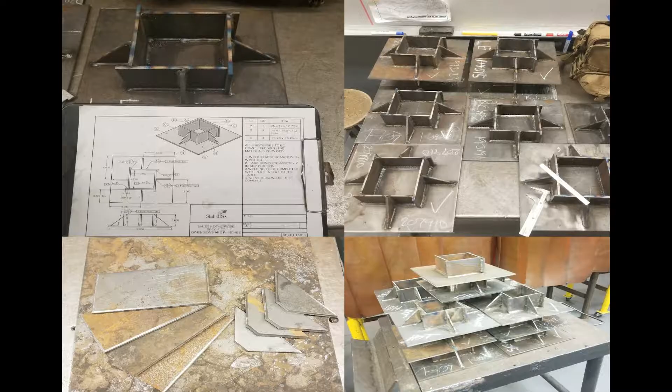And that brings me to my fabrication class. I teach students how to read and interpret blueprints and the many welding symbols they may encounter, and I have several projects that put the information to use. I also teach students how to use various machines that aid in fabrication and are not covered in conventional welding courses. The picture you see here is one of my many projects that I give students.

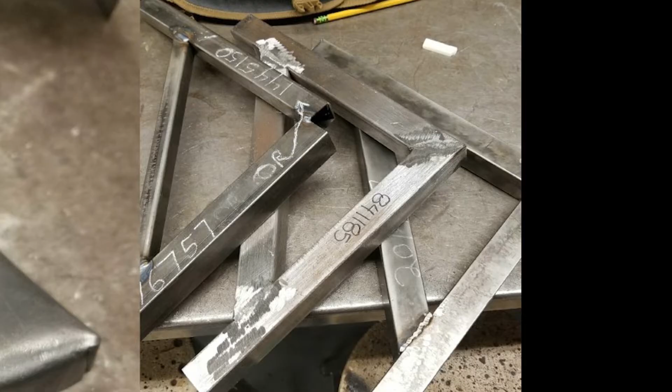This is another project I have students work on, but this is an older version. The newer version is far more appealing to the eye and more practical, and students can use it on future projects if they manage to build it correctly. It's called a welder square in our class, but in industry it's called a speed square.

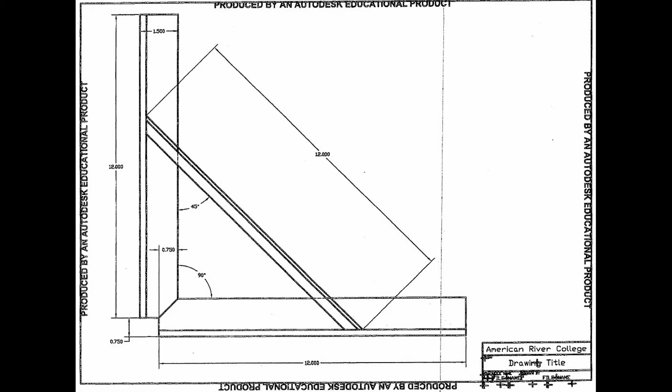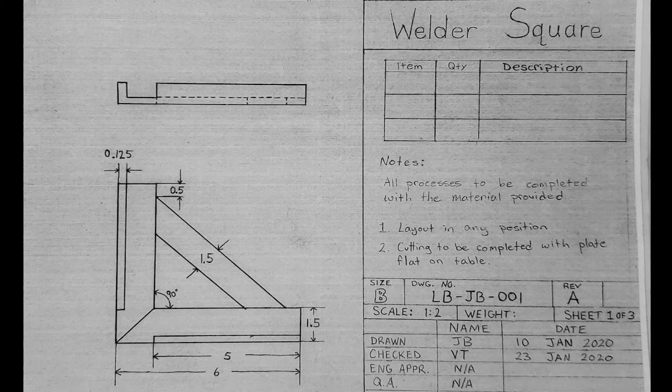But in the end it's hand drawn, and it's not something they would normally encounter, so I had to keep working on it. Since the point of the class is to learn to read and decipher weld symbols, I also have to include examples of these on future blueprints. How else will students learn the skill if their blueprints don't include weld callouts?

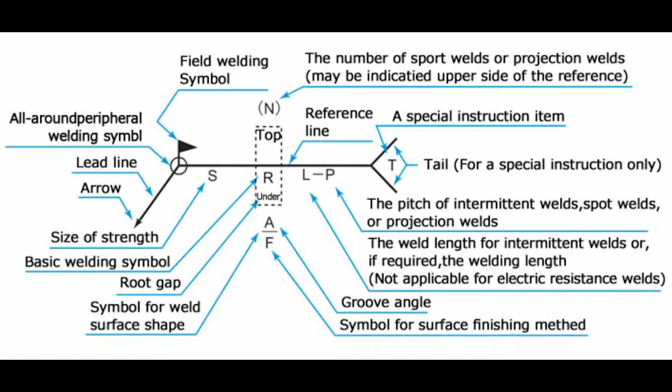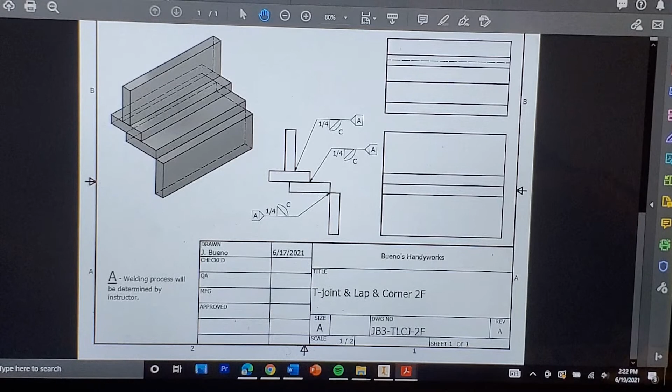I tried many various programs to put together projects and blueprints to use in class. I used a program called AutoCAD, which I'm sure you've heard of or may be familiar with. Let me tell you, if you're a beginner trying to teach yourself how to use these programs, AutoCAD is definitely not for you. For me it was not user friendly, and it was nearly impossible just to grasp the concept of how to put together simple projects. So I ended up ditching that.

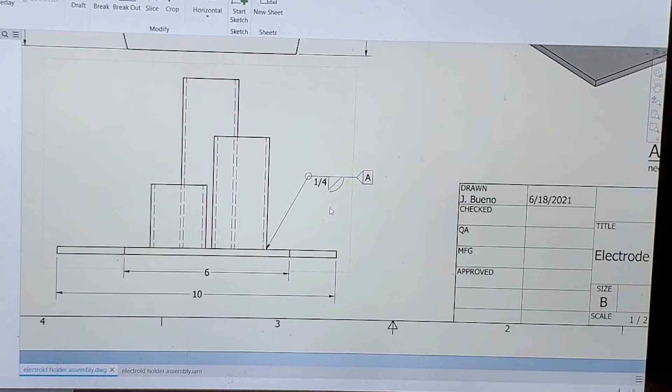I ended up hearing about a program called Autodesk Inventor Pro, and I lucked out—as an educator you can use the program for free. So I gave it a shot. After playing around with it, I think I learned enough and grasped the concept on my own to start making smaller projects and working my way up, and of course building blueprints for each one of those projects.

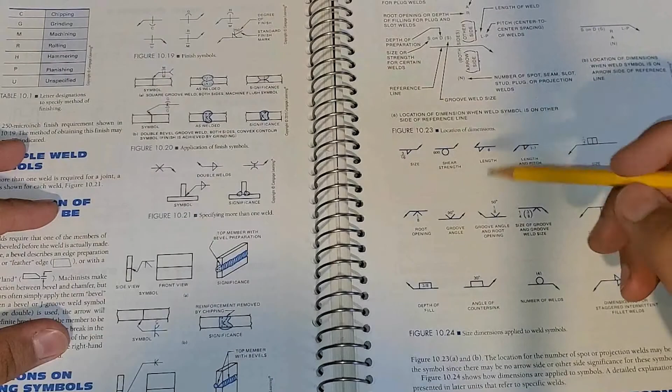This is the most recent edition of the blueprint for the Welder's Speed Square project. Like I mentioned before, it's more appealing to the eye. It's been cleaned up, it's been spread out, it contains multiple views of the project, it has all the crucial dimensions labeled, and it has a lot of the title block information included.

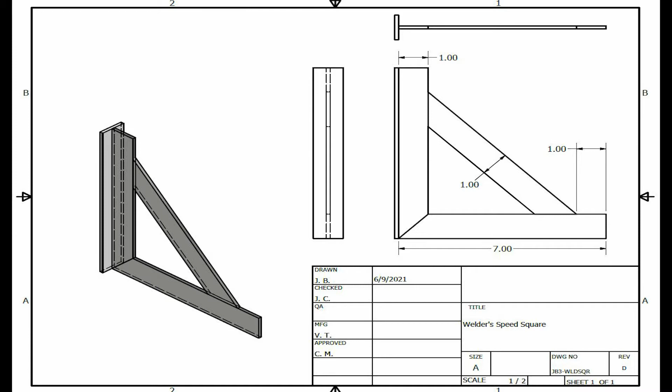Even though I've become more proficient at using this program, this blueprint still took me about 2 hours to complete. I have to create all the parts and then assemble them within the program, and then I use that assembly to create the blueprint.

Getting the blueprint finished is only a third of the objective. I have to record a demonstration of the project and then upload it so that my students can access the content. To do all that, I'm going to use a combination of digital tools.

I'm going to use a GoPro and my cell phone to record video. I'm going to use a voice recorder on my phone to do some voiceovers. I'm going to use snipping tool for any still shots that I need to take from the video clips. And I'm going to use Adobe Premiere Pro to edit and splice all of my video and audio files.

Lastly, I'm going to upload the files to Canvas for my students. And if the video file is too large for Canvas to support, then I'm going to upload it to my YouTube channel and provide a link to it in Canvas.

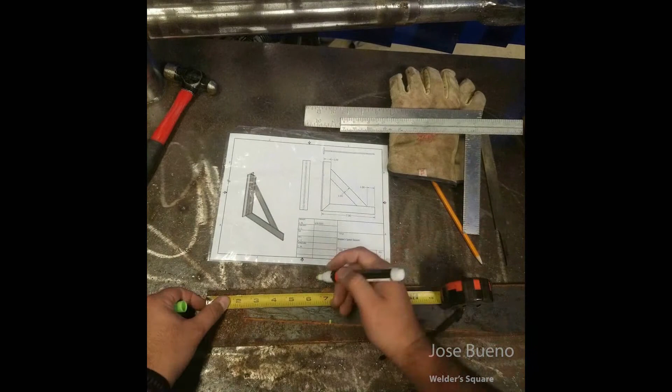The demonstration I'm recording opens with a brief overview of what the project is. Then I move right along, step by step. I show just how to apply given measurements from the blueprint onto the material given.

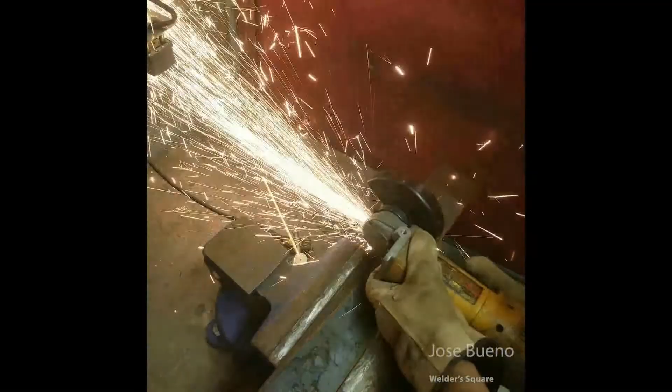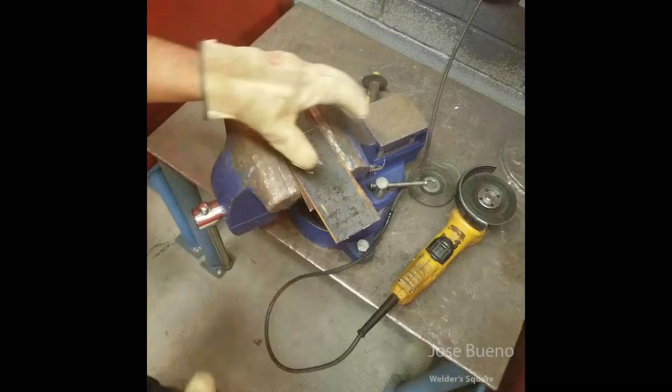I then demonstrate a couple different ways to cut the pieces out, then measuring for the next cuts. And again, I show an alternate method that can be used to cut the next pieces. We go through some verification of dimensions, and then it's back to cutting more pieces.

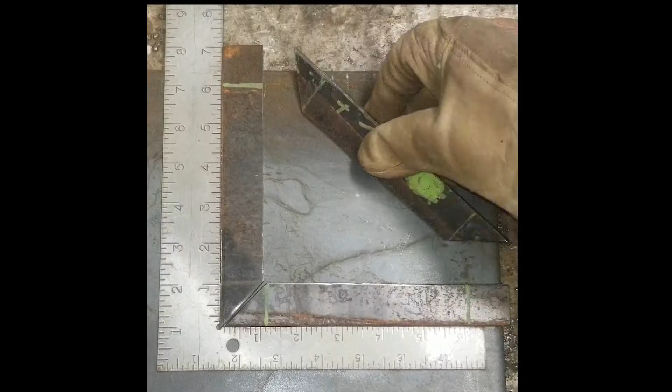After each new piece is cut, I show them that they need to fit all the pieces together to ensure proper fitting. That way, if there's any modifications that need to be done, like grinding a little bit more on one edge, then they can go ahead and do so, rather than find out at the very end that something happened.

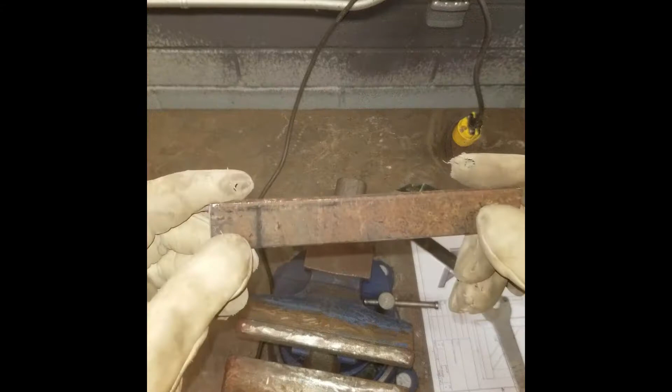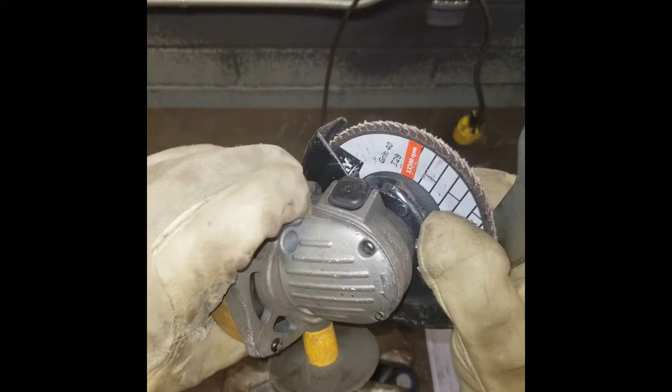Then I bring up preparation for welding and how important it is to make sure that the metal is clean. I demonstrate switching out a flap disc for a wire wheel and how they can do the same thing with a grinding disc. It all depends on how they choose to grind down the material.

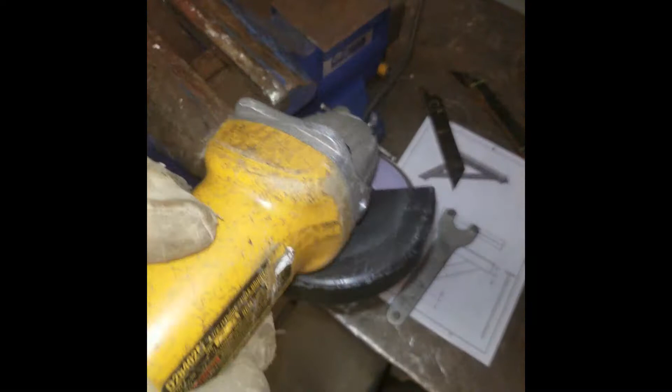I express that all they have to do at this point is grind, but the reason why I'm polishing everything now is to save time at the very end of the process.

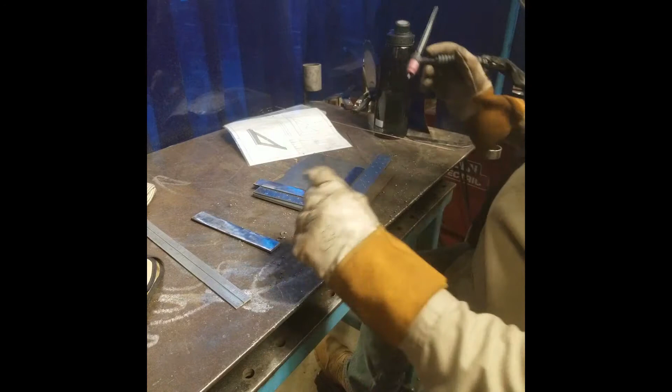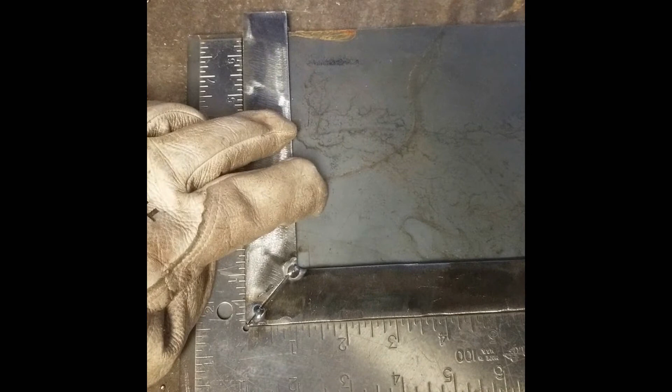And then I take a far shot of myself welding some pieces together. Then I stress that after every single time they weld something, they have to continuously check the fit up to make sure that the heat we've put into the pieces from welding hasn't caused the metal pieces to distort or warp or basically change their shape.

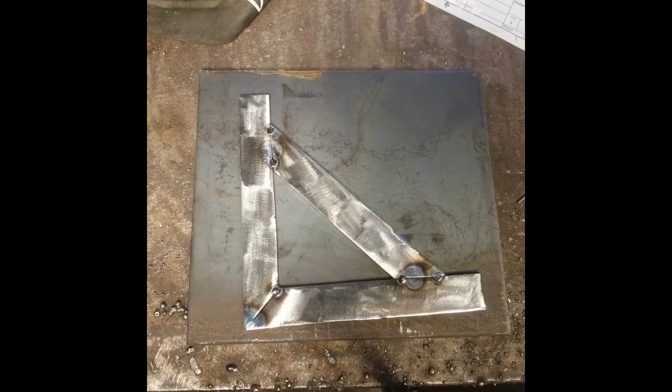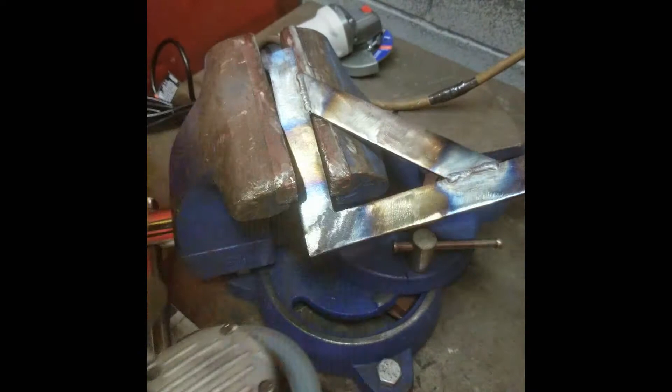After everything is all welded together, I tell them that before welding the last piece onto the project, they need to go ahead and grind their welds here because it's going to be easier to do it now rather than later. I also discuss that it's also the opportune time to polish everything at this point instead of waiting until the final piece is put on, because then it's going to be a little bit harder to polish everything.

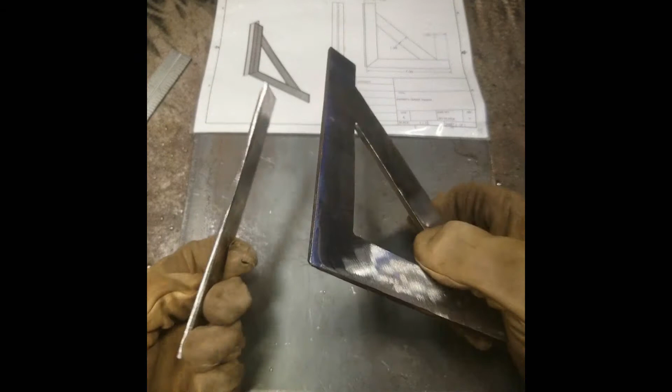Once we get to the very final step, welding on that last piece, I tell them enough direction on how to get it done, but ultimately I leave the choice to them. I want to see them get a little creative with how they attach the last piece.

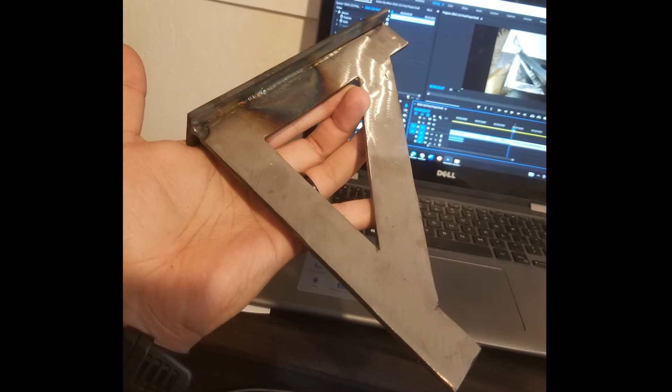And here's where my demonstration pretty much stops. I have a little bit more video that I've shot. I haven't been able to edit it yet, but here's a picture of what the end project looks like. I still have to go through and polish up the remaining areas on my project, but essentially this is what they're building.

After all the demonstration segments have been recorded, it's time to start editing. So I sit down at my computer. I just have a laptop. It's not really made for editing video, but I make do with it.

I have to open up Adobe Premiere Pro and dump all the video files into it. I have to go through, make sure all the clips are in the right order, cut out all the unnecessary parts, just to make sure that the students get the meat and potatoes of what the project is and how to do it.

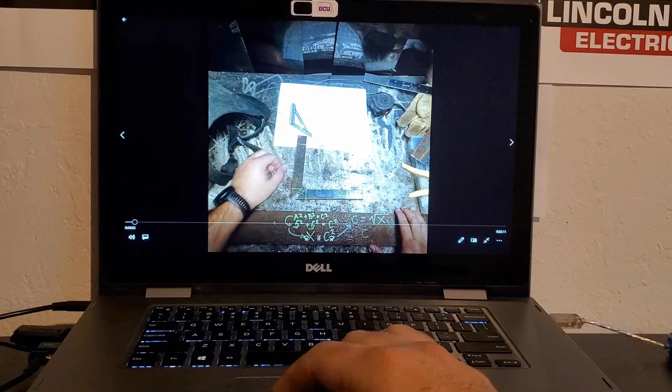I find the areas where the background noise is a little too loud, and I'll record some voiceover, and then I'll edit that into the segments as well.

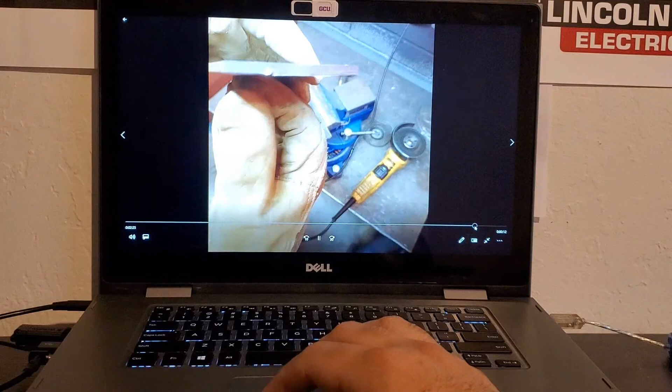Once everything is done, I save the project, and then I export it, and then I upload it to Canvas, or at least I'll try. I'll find out if the file is too large to be supported by Canvas. If so, I just throw it up into my YouTube channel and provide a link for my students in the Canvas module.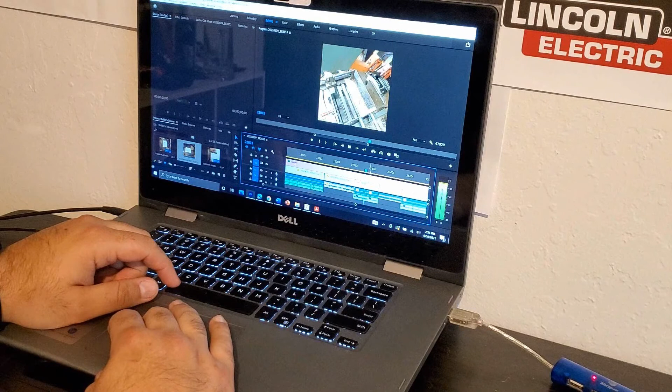And that is how I'm going to use technology to better my classes, and hopefully other instructors will catch on and continue this sort of process to improve their classes, and eventually we'll see huge improvements and huge leaps in the world of CTE.